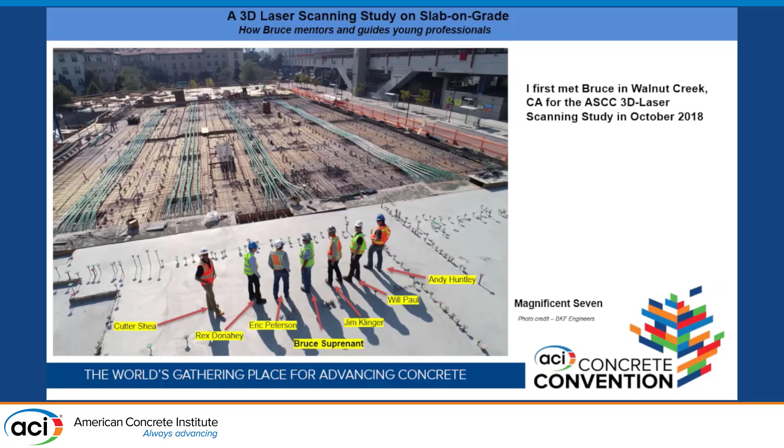That was in October 2018, and then in January 2019, Bruce hosted a second ASCC laser scan workshop in Las Vegas before the World of Concrete. I was also asked by him to share some of my workflow and discuss best practices from that study.

Since then, unfortunately, because COVID hit and things slowed down, not much happened during those 2 to 3 years in terms of laser scan studies on concrete, until late 2021. It was a day in December, I got a call from Jim Klinger after he discussed it with Bruce, and he asked me, 'Hey Leo, there's a potential laser scan study we can do for a slab-on-grade test panel, are you interested?' I said, yeah, I'm all in.

So some background of the second study I was involved in, working with Jim Klinger and Bruce. Conco has a formwork and equipment yard in Martinez here in the Bay Area, and we needed a new access road at that time. Meanwhile, we had a parking garage project ongoing where they had some issues with the F number testing result on the swirl finish slab.

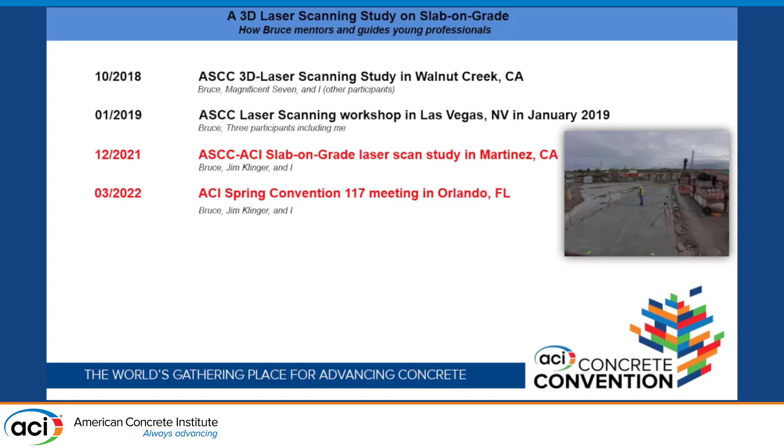After the convention, we kept working on the articles. Eventually, we published 3 articles in the same year, every other month from May to September. As Bruce said, it was his first time publishing 3 in a year, and definitely my first time working with him on articles.

Earlier this year, I worked with some folks at another organization called USIBD. We host a laser scanner shootout event at the World of Concrete conference in Las Vegas, to compare the laser scan results from different manufacturers. When I mentioned that to Bruce, he said, how about you go ahead and write some articles for Concrete International as a follow-up from last year's study.

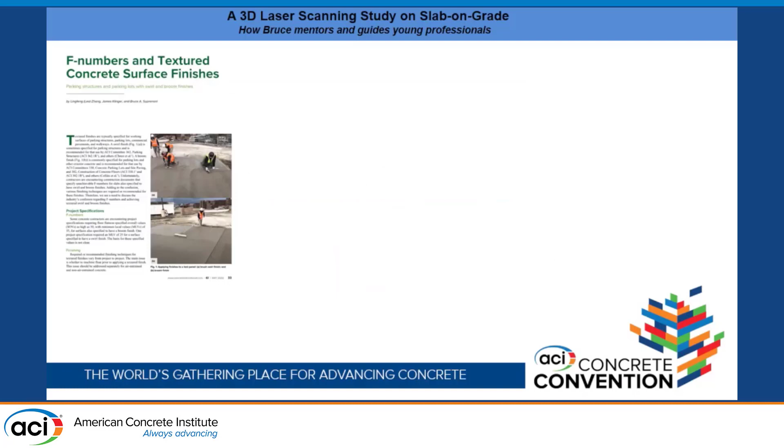These are some screenshots of the 3 articles we wrote. The second one, in Bruce's words, is a 7,000 word monster - that was a long article. It was a long process working with him on that, with a lot of Zoom meetings and a lot of emails back and forth.

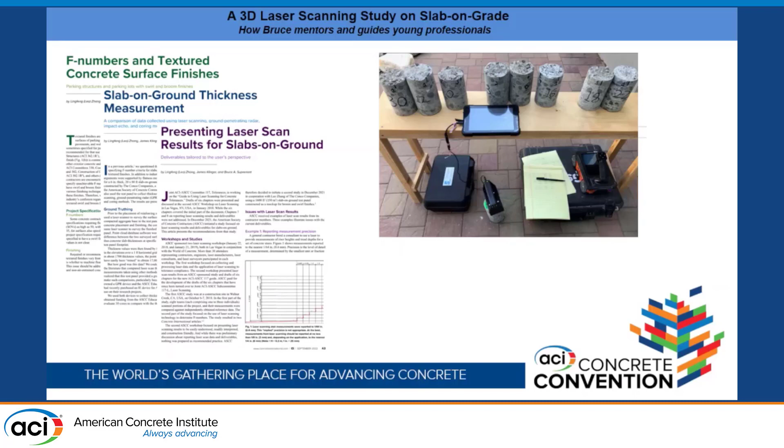Sometimes he asks for results - that was the coring methods where I rushed to Oakland to pick up all the results, come back, do some more testing, and send him the numbers he needs. Same thing with the article picture, he asked me the same thing. I wish I'd used this one, it's gonna be viral in that case.

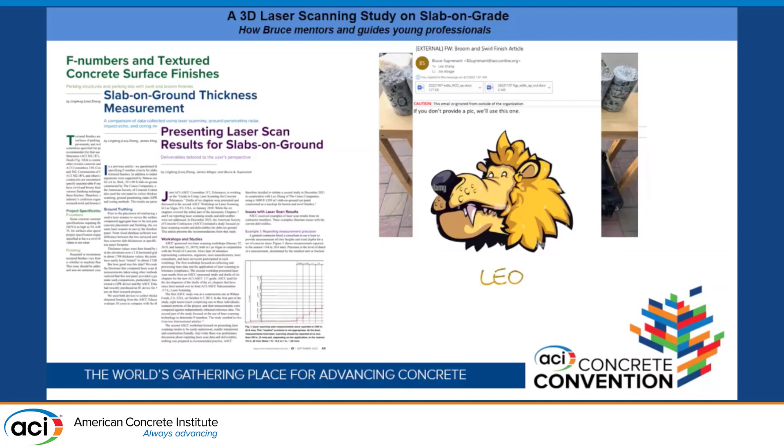But seriously, Bruce is really supportive in many, many ways. Every time I have questions about anything concrete - tolerance, ACI, the committee work, standards - he always gets back to me quickly through email, sometimes even text. A lot of times I got more information than I was expecting, and he even sent all the references and guidance for me. That's really, really supportive.

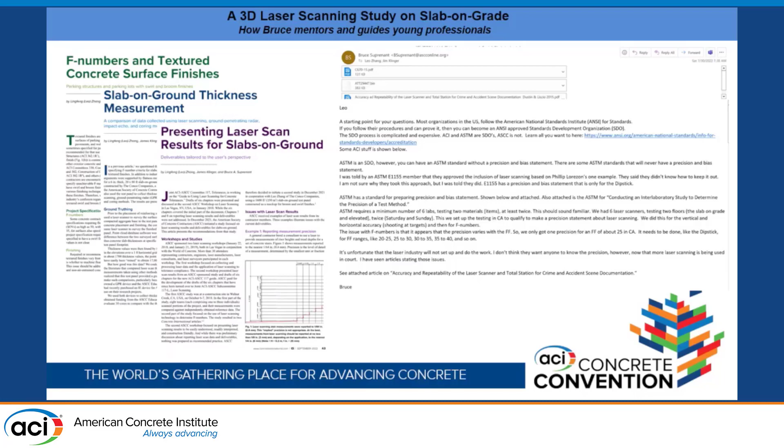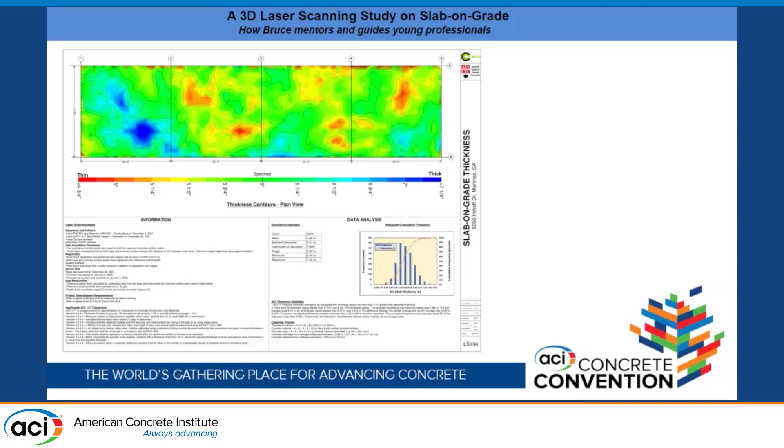That was from the study, and I didn't stop there. I actually applied what he taught me and guided me through from the research to my daily job. This is actually an ongoing project - if you pass by the Niner Stadium these days, or fly out of San Jose Airport, you're going to see 3 big tower cranes there. It's an ongoing project that we're doing.